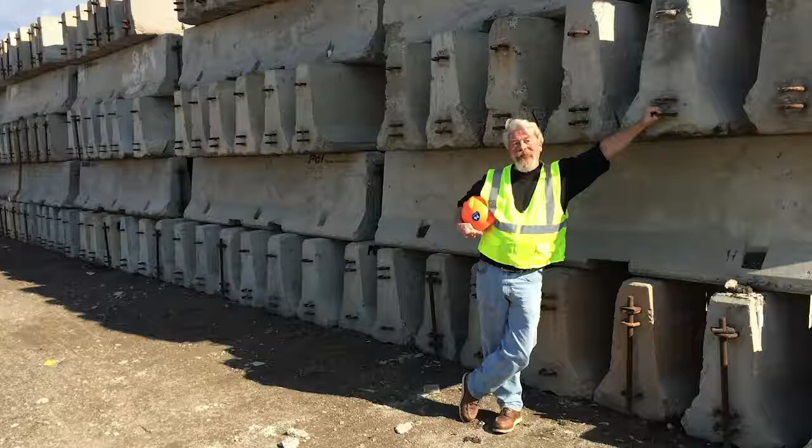The construction manager for this project is Rachel Wiedig.

HCPCI is dedicated to providing MnDOT with a project that is designed and constructed in accordance with HCPCI Design-Build Projects Conform Contracts. Our goal is a project that is safe, buildable, environmentally sound, maintainable, durable, and functions for the traveling public.

To accomplish the above goals, we are committed to emphasizing the importance of a quality project to all project personnel. The Quality Management System establishes quality management processes and procedures, integrates quality goals of design and construction, defines standards and procedures for quality management, assigns the responsibility for specific quality management functions, and establishes a process where quality is built into the product. All persons working on this project are responsible for project quality.

Success will be defined as providing a quality project, providing the understanding of quality, and project certification and acceptance.

Responsibilities: the contractor and all individuals working on the project are responsible for the construction quality of the project and for complying with the project scope of work and their quality manual. MnDOT is responsible for performing construction quality acceptance verification testing and inspection and auditing of the contractor's management system.

What is project quality? Constructing a well-designed plan means building according to the Release for Construction Plans, or RFC. Field Design Change, or FDC, is a tool for correcting plan errors and making changes as necessary to match field conditions and documenting the changes. Examples can be moving catch basins to work around conflicts found in the field, moving rebar locations to allow for better placement, or the addition of a cutoff drain to intercept water from a sand seam.

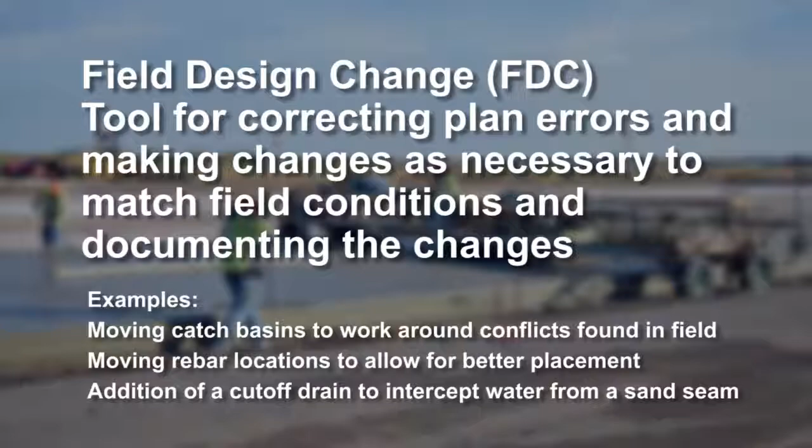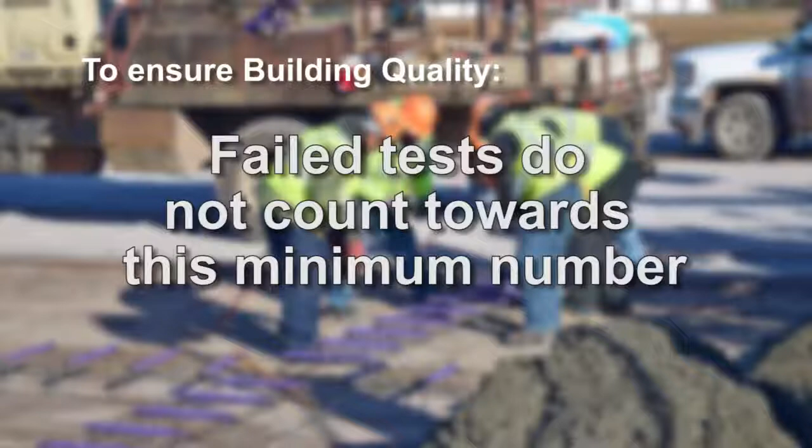To ensure building quality, all construction must adhere to MnDOT specifications and standards. All field and laboratory testing must be conducted and reach the minimum number of passing tests. Failed tests do not count towards this minimum number. Certify supplier material quality standards prior to incorporation of the material. Follow RFC plans. Communicate plan errors and resolve them at the appropriate level.

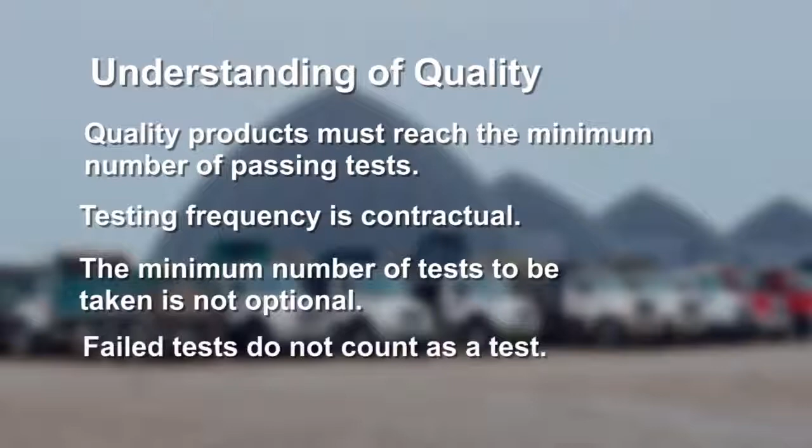Understanding of quality means the owner knows a quality product has been provided, and this is as important as quality itself. Quality products must reach the minimum number of passing tests. Testing frequency is contractual; the minimum number of tests to be taken is not optional. Failed tests do not count as a test. Any failing are documented and resolved.

Tools for providing understanding of quality include allowing for testing and inspection of all products to assure quality status. Quality incentives are in place to provide a superior product. An openness to communicate with the owner, MnDOT, helps facilitate understanding of quality.

The quality management process will perform sufficient inspections to assure compliance with specifications and the MnDOT schedule of materials control. This includes assuring that all personnel performing work on the project have the necessary experience, certifications, skills, education, and training to perform work affecting project quality.

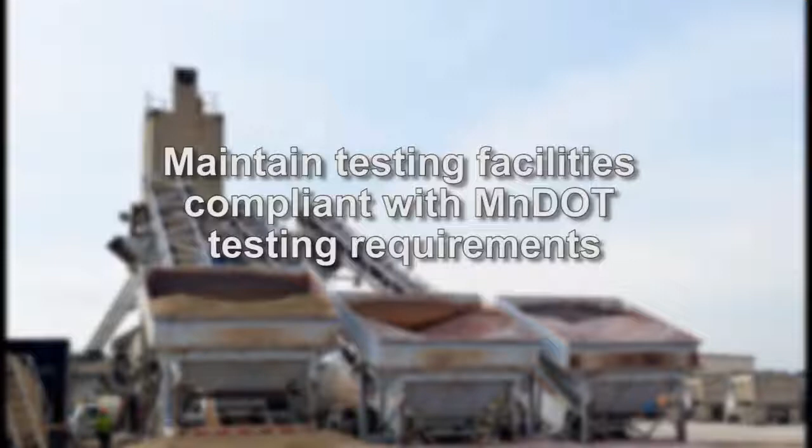Maintain testing facilities compliant with MnDOT testing requirements. Document purchase, receipt, storage, and protection of the materials on the project. Testing and inspection records are to be maintained and made available to MnDOT. Documentation and resolution of non-conforming work. Monitor post-design changes working with the construction team, inspection staff, and designers with the development of as-built drawings.

The foreman is the most important component of project quality. They must make sure that construction goes according to plan and specification, including adherence to MnDOT specifications and standards. Achieve passing material test results by knowing all material type and placement, using the right materials in the right place.

Request testing when needed or appropriate. Monitor moisture and density control throughout construction. Identify potential conflicts in plans for potential FDCs.

A critical activity point is a specific point in the construction process at which further activity associated with the deliverable is suspended until formal acceptance of the interim product is obtained.

Some examples include subgrade density and tolerance is checked prior to placement of aggregate base. Aggregate base density and tolerance is checked prior to paving. Concrete forms and reinforcing steel checked prior to concrete placement.

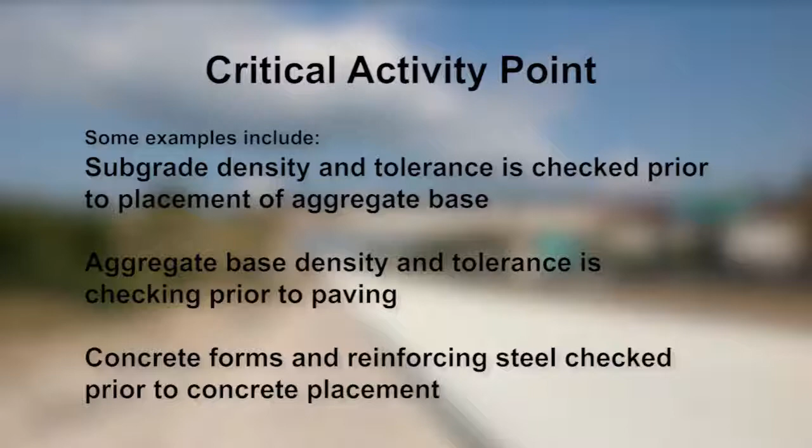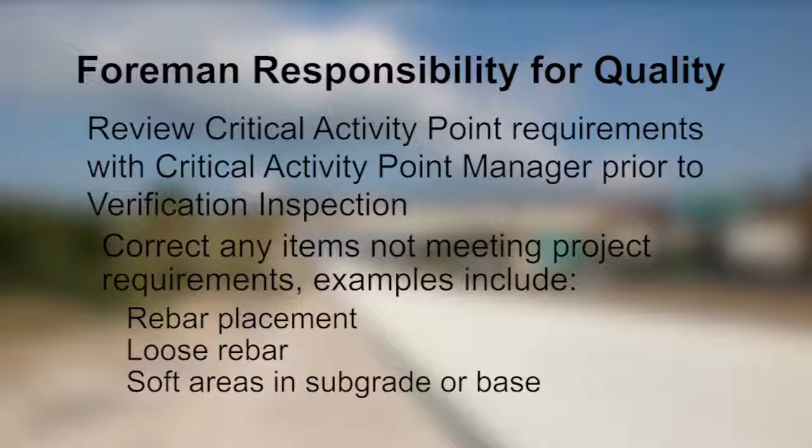Foreman will review critical activity point requirements with the critical activity point manager prior to verification inspection. They will correct any areas with failing test results and correct any items not meeting project requirements. Some examples would include rebar placement, loose rebar, soft areas in the subgrade or base. Foreman will also communicate with the critical activity point manager and MnDOT verification.

The critical activity point release form must be signed off and accepted prior to the next phase of construction. Critical activity points must be signed off and accepted by the following: Design Build Team Critical Activity Point Manager, CAPM, Design Build Team Foreman in charge of the activity, and MnDOT Verification Representative. All must agree that the critical activity point requirements have been met.

Materials delivered to the project are a critical activity point and must include the appropriate documentation prior to unloading. They also require inspection by the CAPM or quality inspector prior to incorporation into the project. Remember, quality is everyone's responsibility.

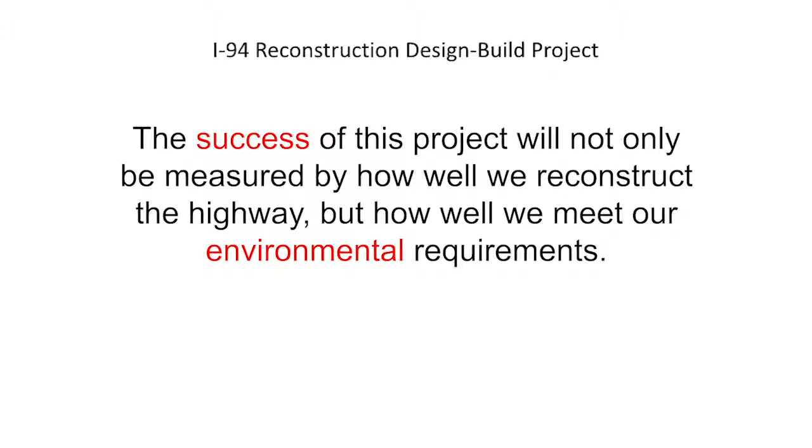The success of this project will not only be measured by how well we reconstruct the highway, but by how well we meet our environmental requirements. We have environmental commitments in protecting the environment. These commitments require permits and permit conditions, including the DNR Public Waters Permit for working in these waterways, the NPDES for sediment control, and erosion control from the MPCA.

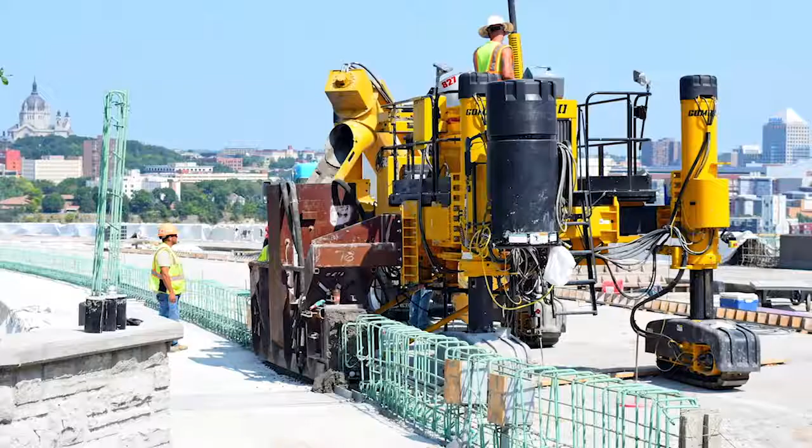These agencies will inspect the sites. Workers will be informed during toolbox training as to when to expect the agencies.

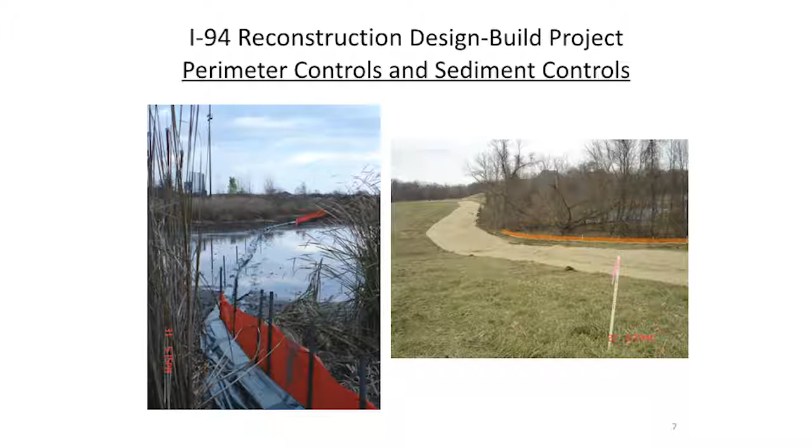In order to protect the project and meet environmental commitments, we will be installing perimeter controls. These are the last line of defense. Perimeter controls will consist of silt fences, inlet protection, filter logs, and stabilized berms. All perimeter controls must be installed properly and maintained.

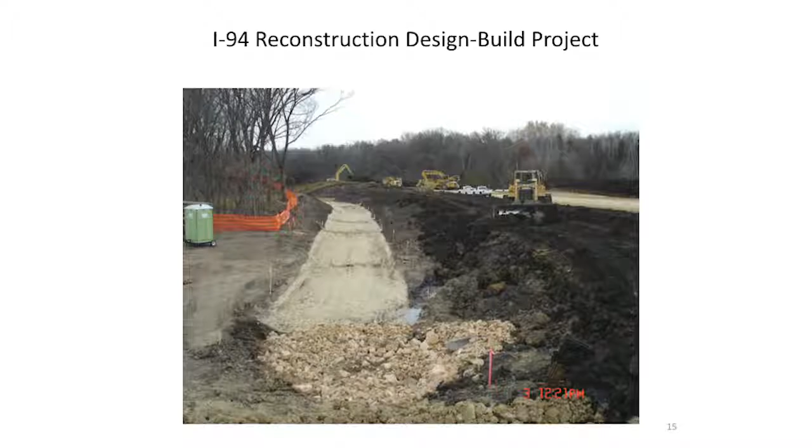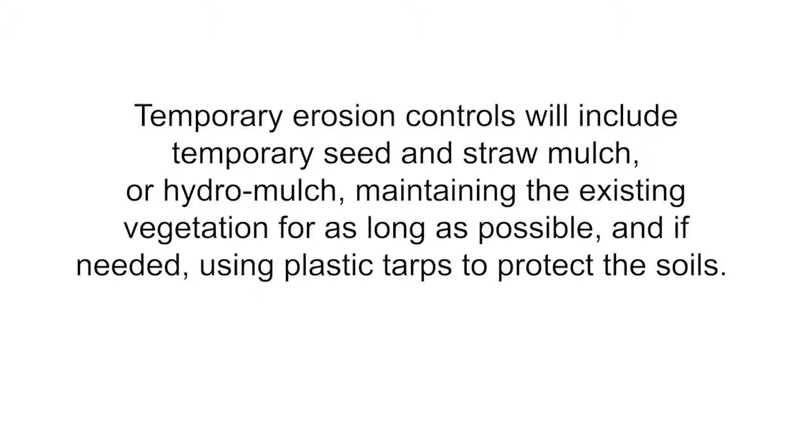Erosion control is the first layer of defense. It's easier to try and stop erosion than to try and capture soil particles once they start moving in rainwater. Temporary erosion controls will include temporary seed and straw mulch or hydro mulch, maintaining the existing vegetation for as long as possible, and if needed, using plastic tarps to protect the soils. Permanent erosion controls include turf and erosion control blankets.

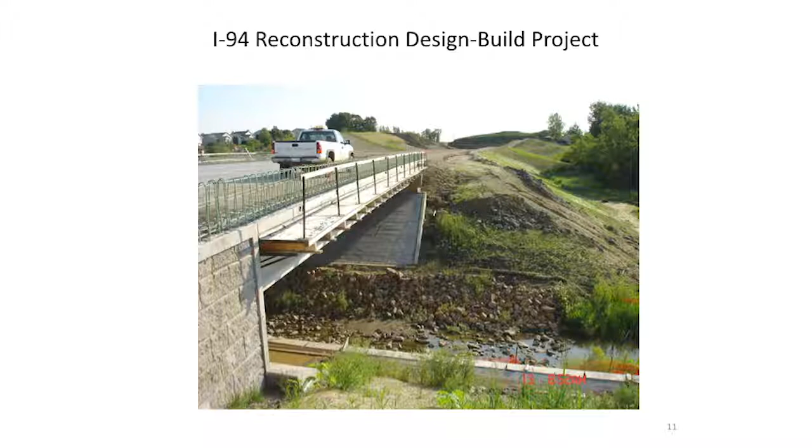Not all of these controls are performed at the same time and may be implemented throughout the stages of construction, especially at a bridge site. Different controls can be utilized numerous times over the same area. You must not drive over or damage an area that has an erosion control blanket in place. Work with your supervisor if you need to enter these areas.

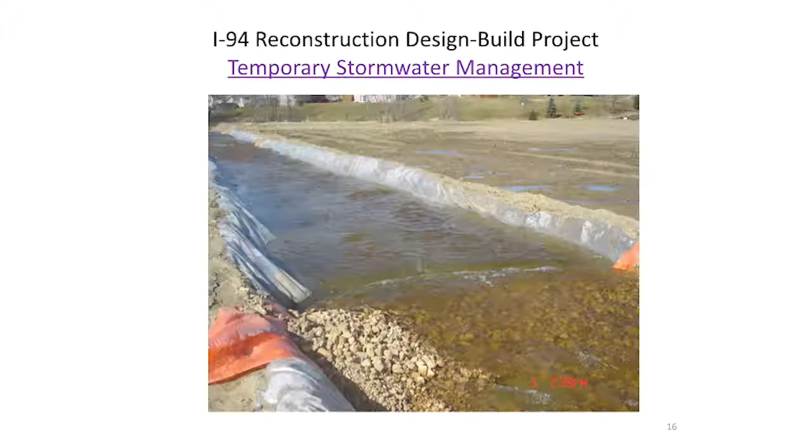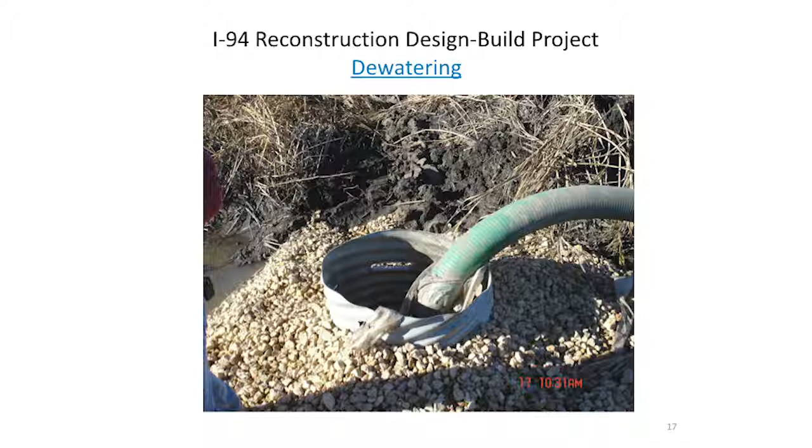All drainage ways that carry water off of the project must be stabilized within 24 hours of completion, so proper staging is needed. Temporary stormwater management is how clean water is kept clean as it goes through the site. Water bypass may be needed while working in and around drainage ditches. If dewatering is needed, filter devices such as crushed rock sumps must be used on all inlet pipes. Energy dissipators must be used on the downstream side to not cause erosion to the receiving streams.

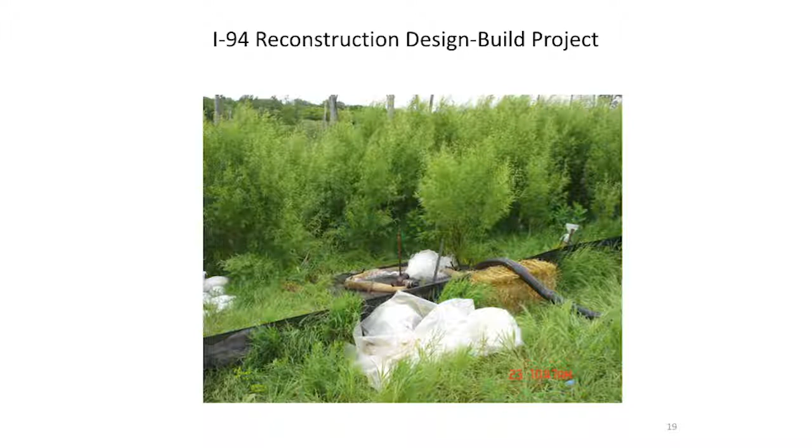There is no one-size-fits-all solution for dewatering, but all solutions must meet the goals of the permit. If you see turbid water in the discharge, the dewatering needs to be stopped immediately and a filtering device added and/or corrections made to the existing filtering device. Dewatering must be performed correctly, with no shortcuts taken.

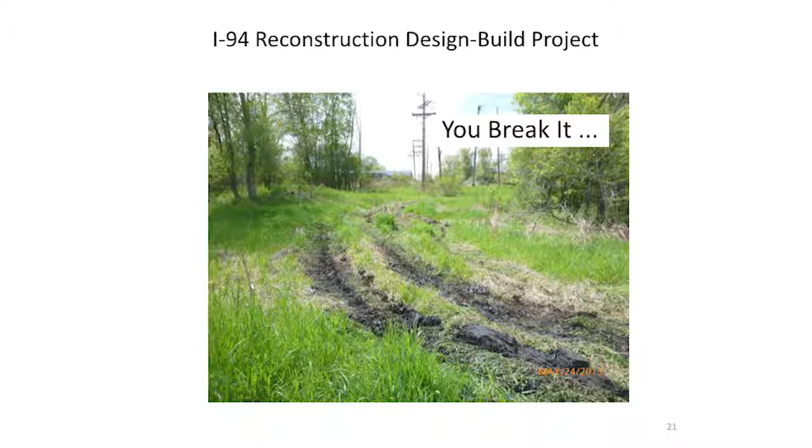Remember to stay within work areas and not drive outside of permitted areas. If you mess up a work area, you must fix it. When in doubt about the area you are working in, make a phone call or talk to your supervisor.

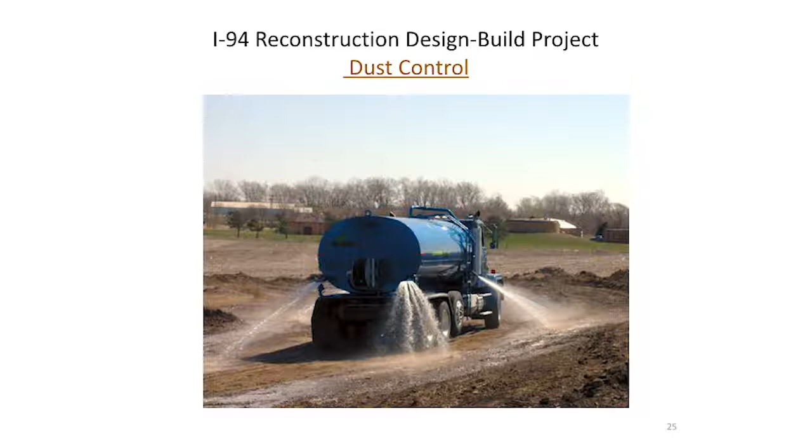First, it's bad for your health. It is also bad for the public's health. It creates nuisance conditions, and it's the law. If dust becomes a problem in your area, contact your supervisor so water can be distributed on site to keep soils moist.

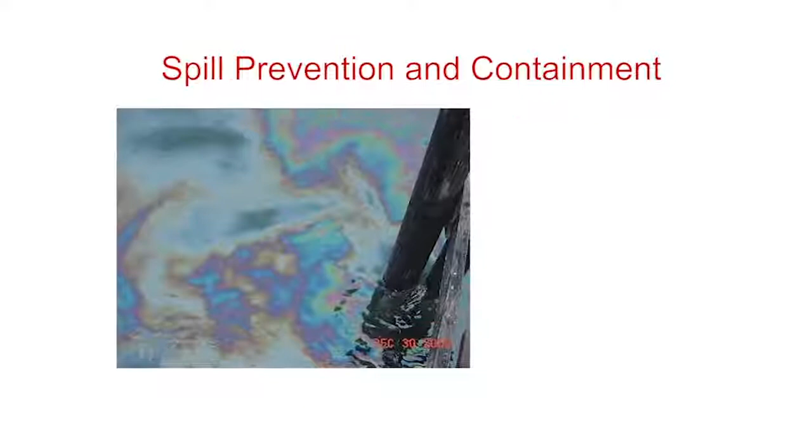Spill prevention and containment. Spills are a major problem as they impact water quality. It is easier to prevent a spill than to try to capture it once it happens. If a spill does happen, contain it as quickly as possible. Spills must be corrected immediately and notifications made.

If a spill occurs, contact the Contractor Environmental Compliance Officer, or CECO, who will report the spill to the State Duty Officer as required. Keep track of how much material was spilled. Subcontractors must provide spill kits and notify all employees as to where they are available. Spilled materials must be handled correctly. Know the requirements of your employer's hazardous waste plan and reporting requirements.

The easiest way to prevent a spill is to put all oil-containing materials in secondary containment or covered storage. Here we have drums on proper pallets or in secure containers.

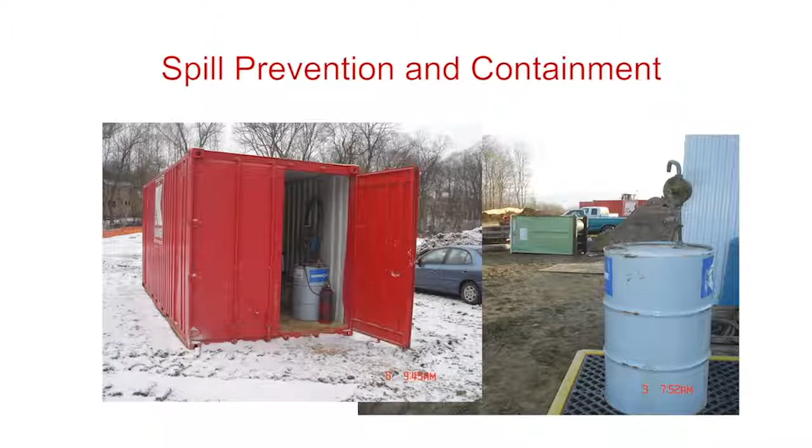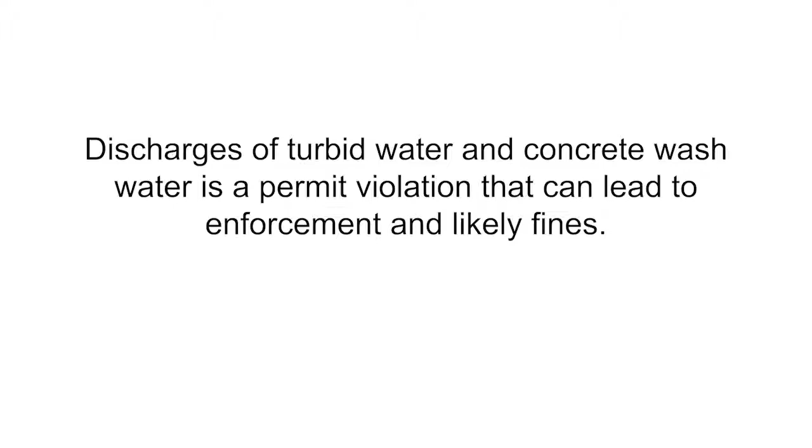Also keep in mind that turbid water, which is muddy water, and concrete wash water are pollutants. Discharges of turbid water and concrete wash water is a permit violation that can lead to enforcement and likely fines. Reporting of these discharges to regulators can occur from citizens' complaints. Never discharge muddy water to a surface water or drainage ditch that eventually leads to a surface water.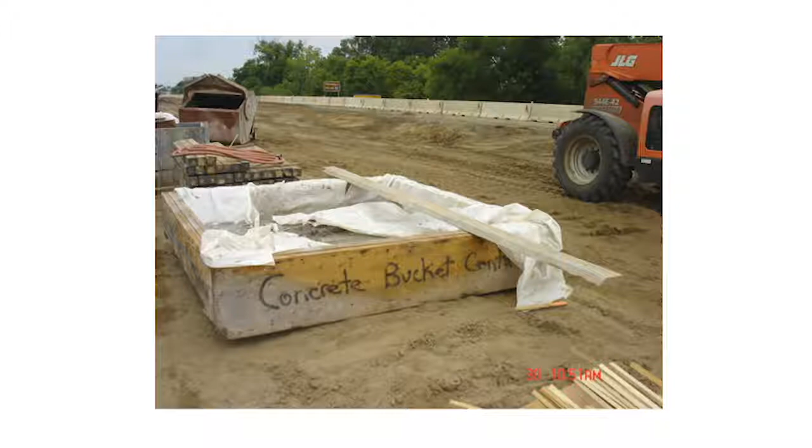Concrete and cement management is also a permit condition. Concrete washout must be done carefully and no concrete or slurry water spilled on the ground. All concrete washing is to be done into lined or metal tubs.

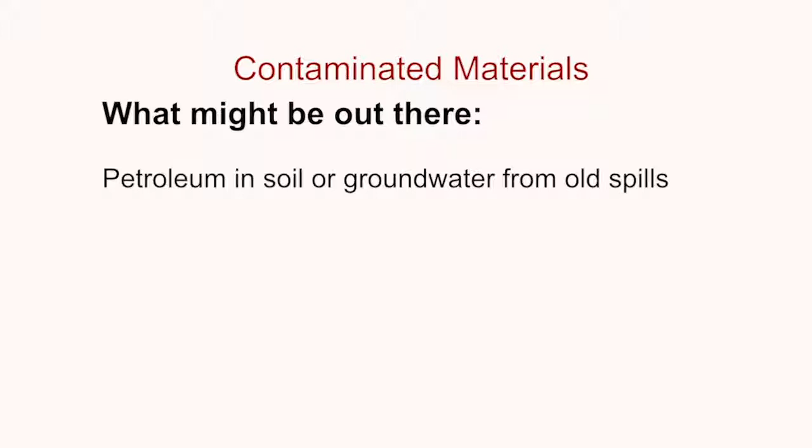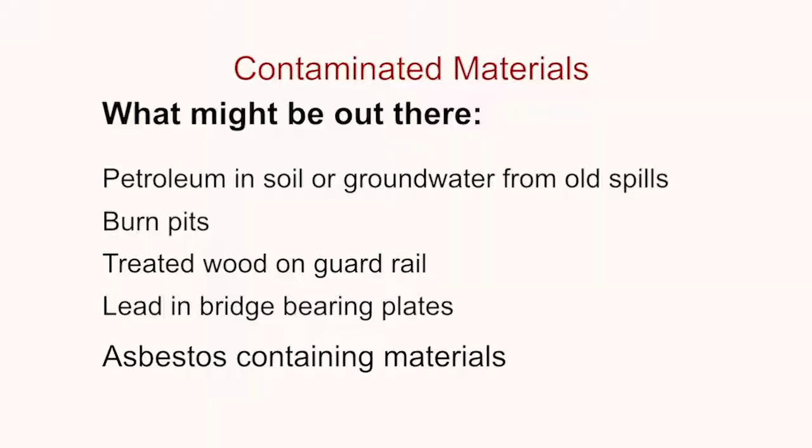Contaminated materials. Some contaminants to look for include petroleum in soil or groundwater from old spills, burn pits from old homesteads or illegal burning, treated wood on guardrails, lead in bridge-bearing plates, asbestos-containing materials. Please note, do not touch asbestos-containing materials. An abatement contractor will do the removal. Proper handling of contaminated materials is outlined in the Contaminated and Regulated Materials Management Plan.

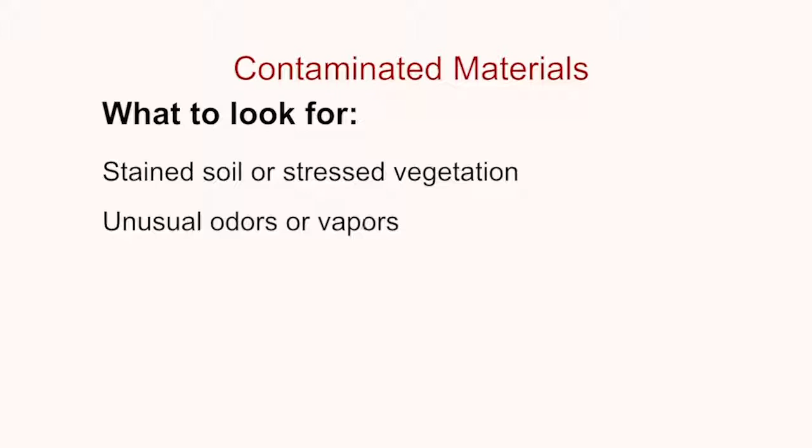We just talked about some known or suspected contaminants, but what about unknown materials? Here are some things to look for: stained soil or stressed vegetation, which could indicate a petroleum or solvent spill; unusual odors or vapors, which could indicate waste in soil or water; oil sheen in water or puddles; buried debris in the soil or illegal dump sites.

Worker health and safety. If we encounter contamination, follow the Safety, Health, and Environmental Action Plan. Use some common sense, like washing your hands before eating and drinking. For extra caution, change your clothes when you get home.

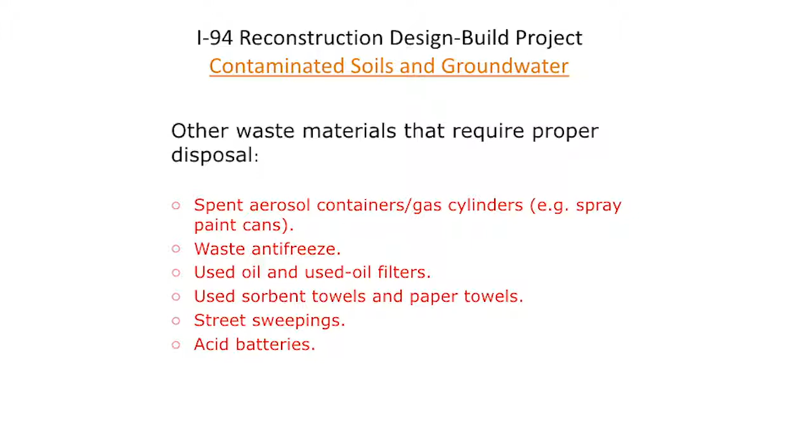Other waste materials that require proper disposal are spent aerosol cans and gas cylinders, used sorbent towels and paper towels, used oil and used oil filters, waste antifreeze, acid batteries, and street sweepings.

If you find something unexpected, stop work. Secure the site and call your site supervisor immediately. If a contaminant is found, we will follow the instructions of MnDOT's Environmental Consultant.

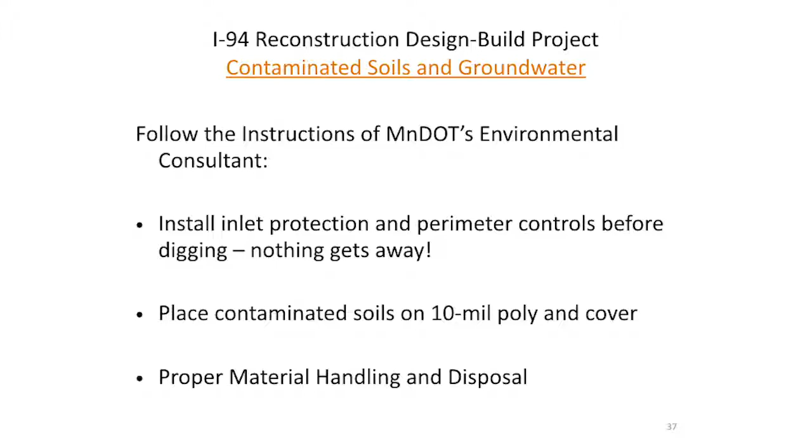Some precautions include installing inlet protection and perimeter controls before digging so nothing gets away, placing contaminated soils on 10 mil poly and covering them, and following all proper material handling and disposal plans. The consultant will take materials for testing. Work will not be permitted to continue until all testing is complete.

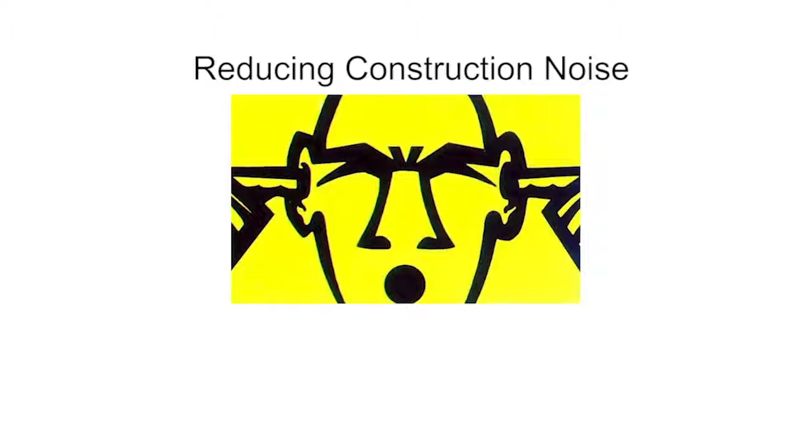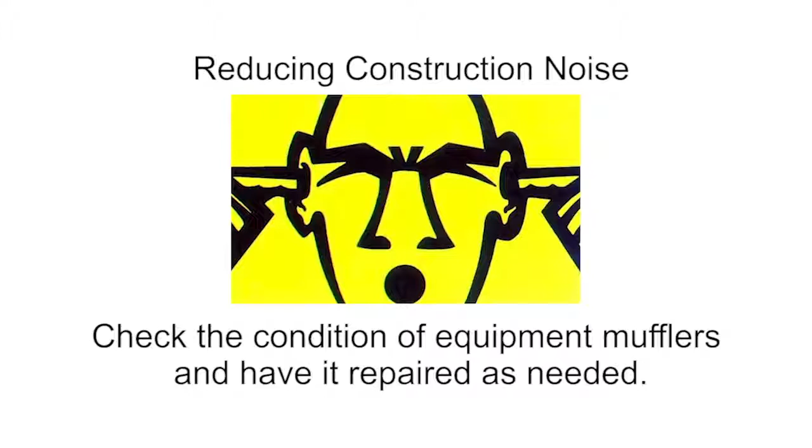It is understood that construction is noisy, but you are required to make every effort to keep noise levels down, including providing temporary noise shielding for noise generators near sensitive areas. Check the condition of equipment mufflers and have it repaired as needed. Use OSHA-approved backup alarms. We will use a one-way haul traffic pattern to reduce the need for backing up. We will strictly enforce a no slam tailgate rule.

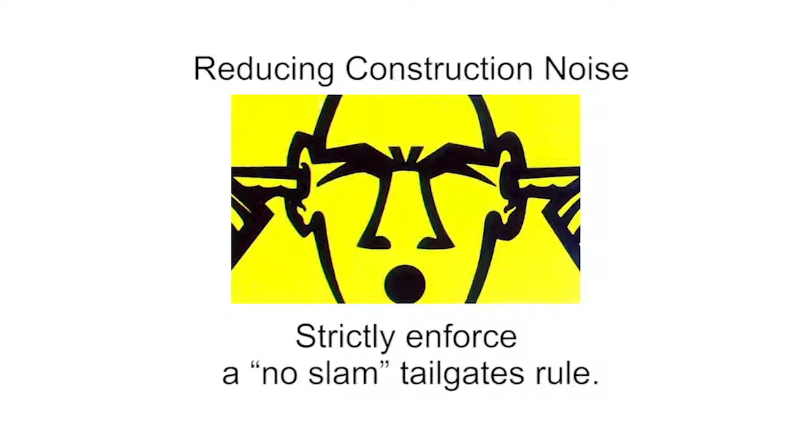MnDOT is committed to following the DNR's best practices for protecting fish and wildlife resources. Blanding's turtles are threatened and may be located in the project area. Northern long-eared bats are also a threatened species within the area.

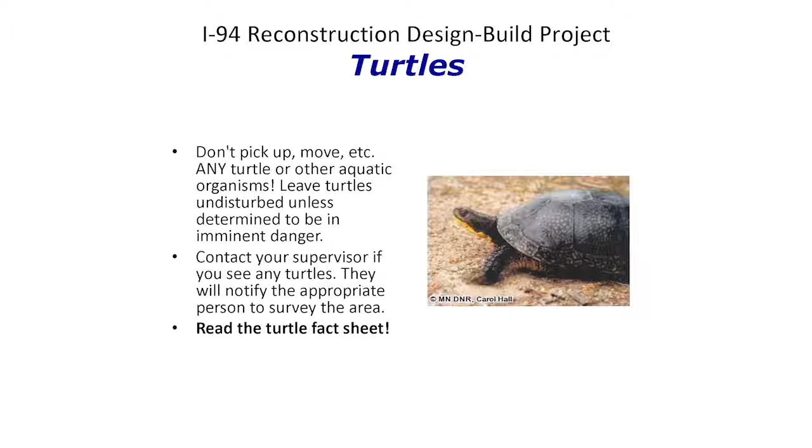Bird nests cannot be disturbed during the nesting season. No work can be permitted in lakes or streams during fish spawning. Leave all turtles undisturbed unless determined to be in imminent danger. Contact your supervisor if you see turtles, and they will notify MnDOT's Environmental Compliance Officer.

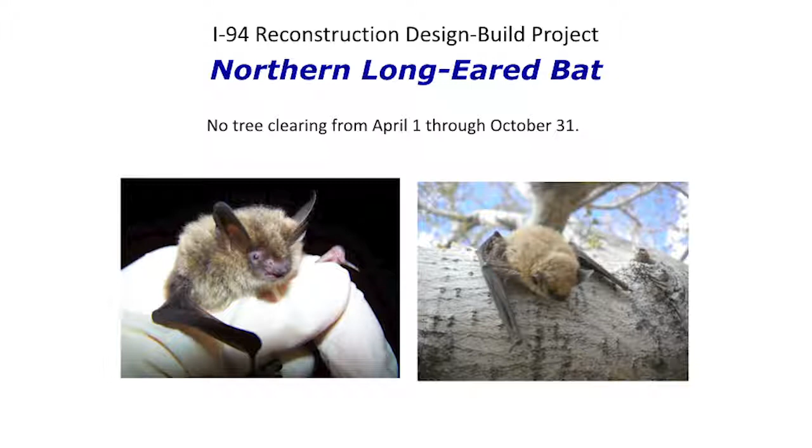Tree clearing cannot occur between April 1st and October 31st during the roosting season for the northern long-eared bat. Swallow nests cannot be disturbed during the nesting season from May 1st to September 1st. Swallow nests can be removed and swallows prevented from building nests prior to May 1st. Fish Creek and Silver Creek culverts are possible swallow nesting sites.

No work can be performed in the Crow River, Fish Creek, or Silver Creek during fish spawning from March 15th through June 15th. And no work can be performed during fish spawning in School, Mud, Locke, and Fish Lakes from April 1st to June 30th.

Also, disturbed soils within 200 feet of these waters must be stabilized within 24 hours of no further soil disturbing activities during fish spawning. Prior to any work in lakes or rivers, and after the work is completed, all equipment must be thoroughly cleaned.

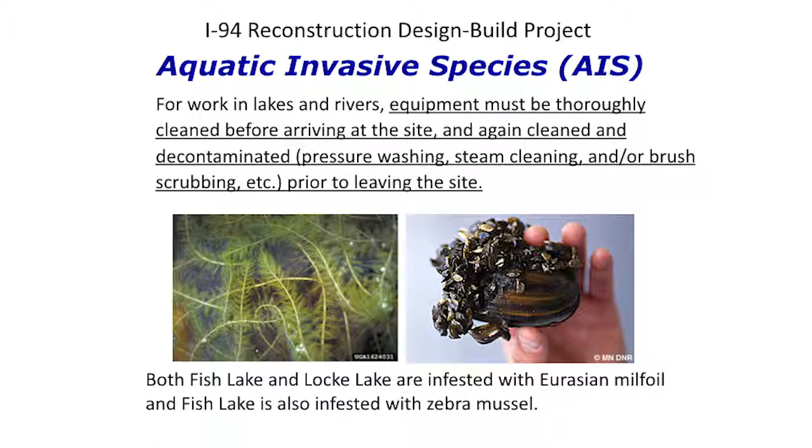Equipment must be decontaminated to prevent the potential spreading of aquatic invasive species, also known by the acronym AIS. Both Locke Lake and Fish Lake are infested with AIS.

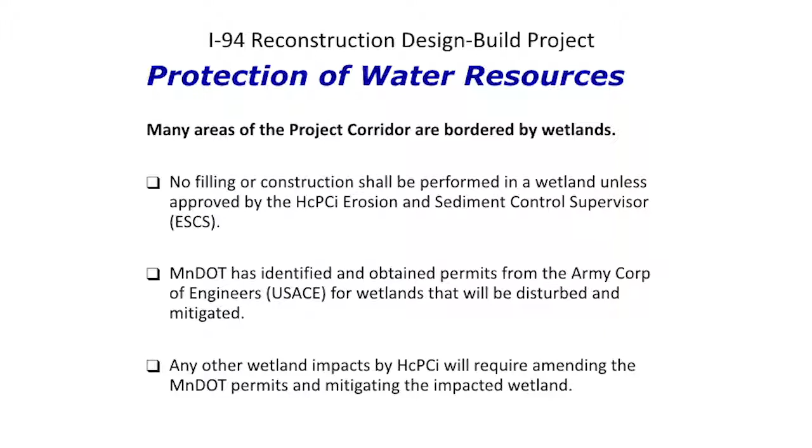Do not perform any work in wetlands unless approved by your supervisor. A permit has been obtained from the Army Corps of Engineers for wetlands that will be impacted by the project. Wetlands that cannot be impacted will be marked by redundant perimeter control, such as the combination of silt fence and biologs.

The project passes through drinking water supply management areas for both the cities of Monticello and Clearwater. These areas represent source areas where municipal wells are replenished by infiltrating source water. Avoid working outside the project limits in these areas.

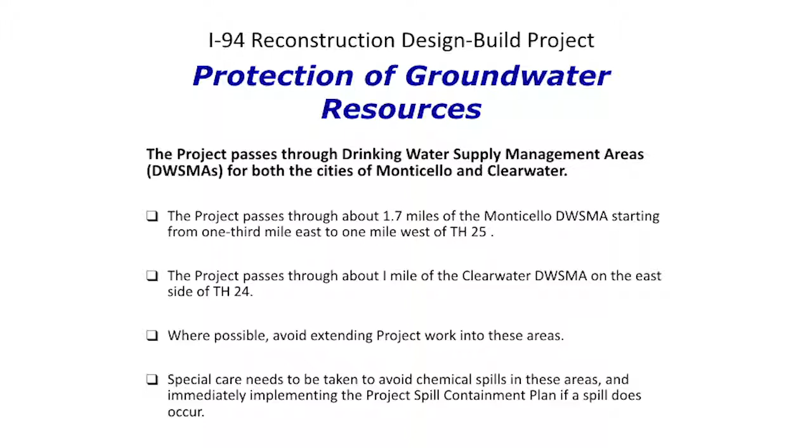It is important to avoid chemical spills in these areas, and if a spill does occur, immediately contain and clean up the spill, provided it is safe to do so.

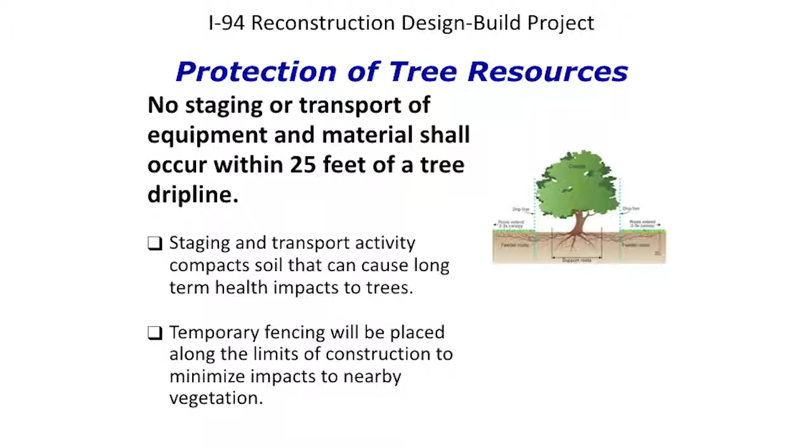Trees need to be protected from long-term impacts due to compacted soil. No staging or transport of equipment and materials shall take place within 25 feet of the tree drip line. The drip line occurs at the outer edge of the tree foliage.

The unexpected. What should you do if you find something unexpected on the job site? Stop work. Secure the site. Call your site supervisor, who will contact the Environmental Compliance Officer.

Notifications. HcPCi's Environmental Compliance Officer on this project is Alan Kessler. The project's environmental compliance efforts are required by federal and state laws and permits, as well as HcPCi's commitment to delivering a quality project in an environmentally sound manner.

The success of this project requires the cooperation of every person on the site. If you have a question, please ask. There are no dumb questions. You can ask a supervisor, the Erosion and Sediment Control Supervisor, or the Contract Environmental Compliance Officer.

For HcPCi projects, it is each person's individual responsibility to be familiar with all safety and health practices outlined by their respective company's safety manual and plan.

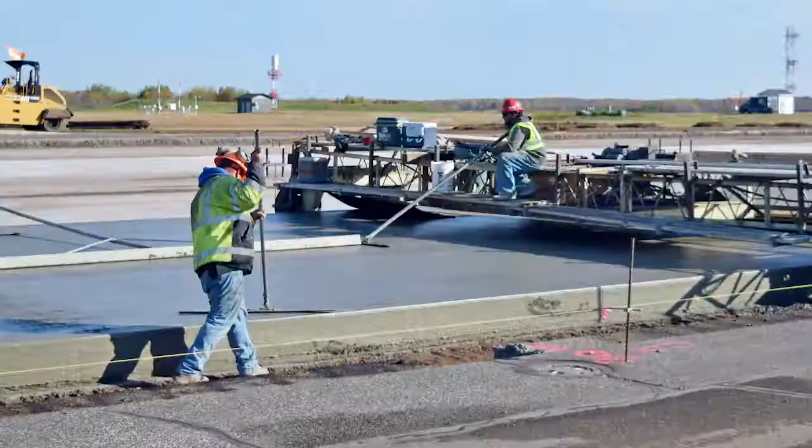Subcontractors are required to educate and train all employees and visitors before they enter the site. Subcontractors are responsible for providing safe working conditions and procedures and perform work in accordance with all applicable laws and regulations, the subcontractor's accident prevention program, and contract specifications.

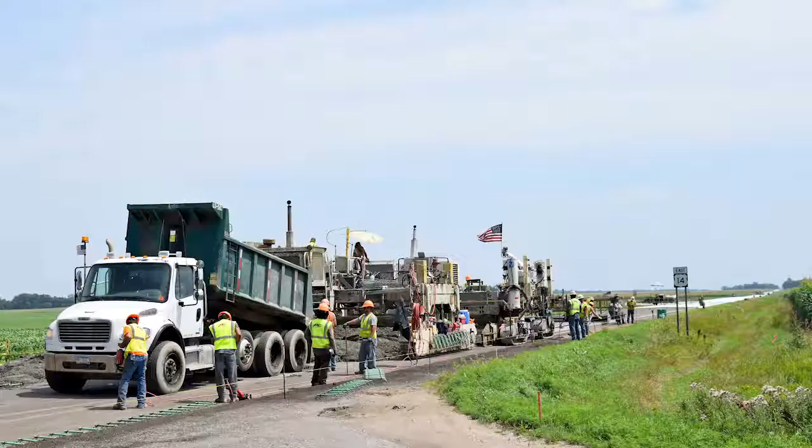All employees will be required to coach each other and visitors on the importance of safe operation and enforce the provisions of their safety policies.

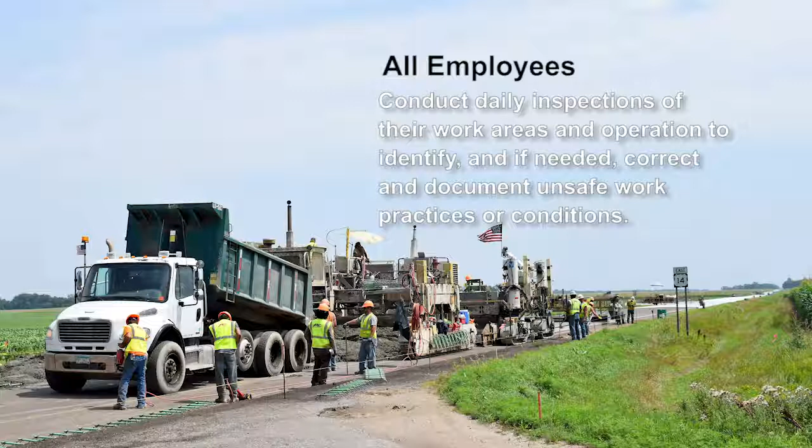Conduct daily inspections of their work areas and operations to identify and, if needed, correct and document unsafe work practices or conditions. Supervisors must investigate all accidents to determine cause and corrective measures.

Supervisors are strongly encouraged to fill out safety pre-task plan cards and complete a weekly site safety checklist. Supervisors must also assist in the development of job hazard analysis for each major phase of work and for all types of operations that have not been previously analyzed.

All work operations must be performed using good judgment in compliance with OSHA regulations and all health and safety requirements. Subcontractors must inform HcPCi of any hazardous conditions created by their operations.

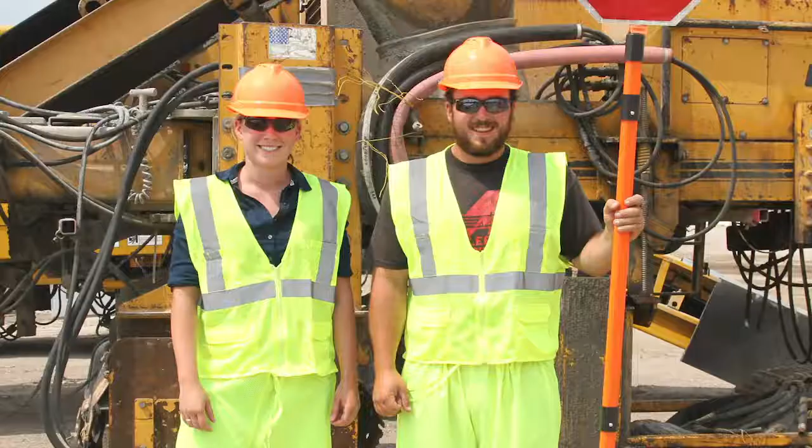Safety is everyone's responsibility. To ensure your safety, proper PPE is required at all times. At a minimum, employees must wear a hard hat, high visibility vest, and work boots while in all work zones.

You can help prevent accidents and injuries before they start by staying alert at all times, by being aware of your surroundings and situations that may cause or lead to accidents or injuries.

Immediately notify your supervisor of all unsafe work conditions or acts. All unsafe conditions and hazardous situations must be corrected immediately. Fighting or horseplay will not be tolerated.

Safety meetings and training. Safety meetings with all supervisory personnel will be conducted by or at the direction of the project manager to review accident prevention efforts and results, along with safety policy and procedures pertinent to the work being performed.

Supervisors will hold toolbox or tailgate safety meetings with their crews to discuss procedures, suggestions, past accidents, and educational materials. Additional meetings may be held when there are crew changes or significant changes in job conditions. This training will be documented.

For operations where more specific training is required by law or regulation, subcontractors must provide their employees additional training and document accordingly. Subcontractors will also participate in safety meetings held by HCPCI when work within the scope of their subcontract is in progress. A record of safety meetings and safety training will be submitted to the project manager.

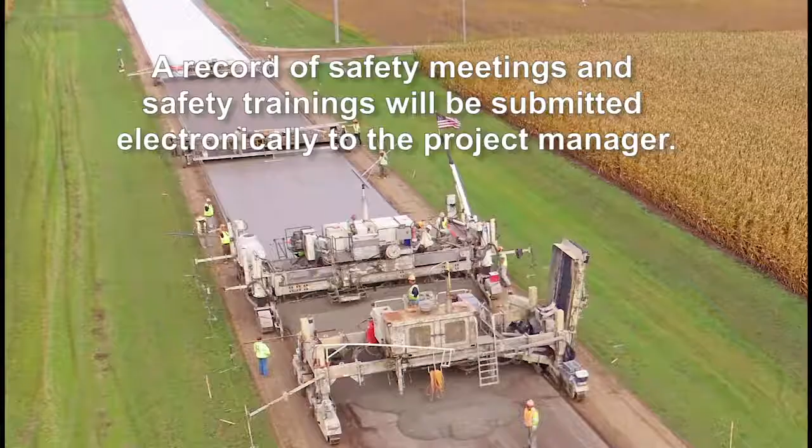It is the responsibility of all subcontractors, supervisors, and foremen to properly train their employees and make them aware of any and all hazards related to road and bridge construction. Proper training must meet MnDOT and OSHA requirements.

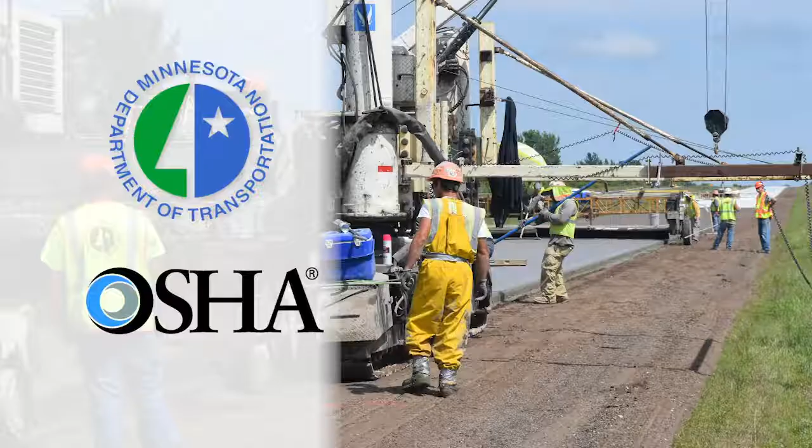Health and physical information: employees should be physically capable of doing their jobs. Be sure to keep well hydrated and be aware of the changing environmental and work conditions around you.

No person will knowingly be permitted on the job while under the influence of any substance, including alcohol, illegal drugs, controlled substances, and prescription or over-the-counter medications.

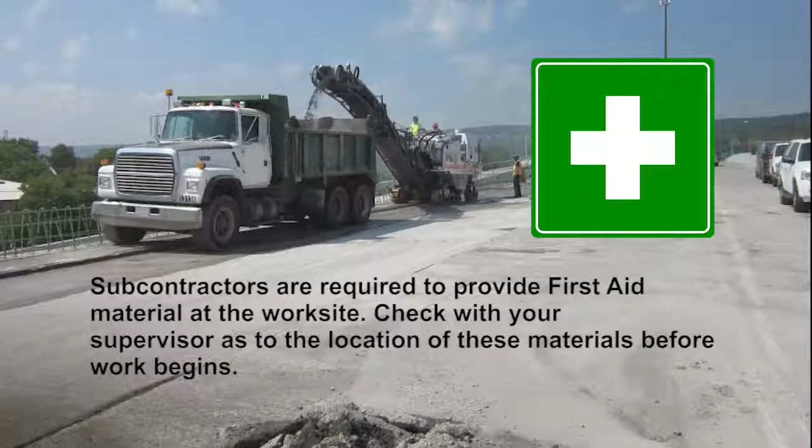Subcontractors are required to provide first aid material at the worksite. Check with your supervisor as to where these materials are located before work begins. At least one employee per subcontractor must be trained in first aid and be available at all times to render immediate treatment. Report all accidents, injuries, and illness to your supervisor immediately, regardless of how small or minor they may seem.

Please note that immediately means the same day the injury occurred. If an employee is injured on the job, that employee's immediate supervisor must complete a first report of injury form, and if needed a claims report, and turn it into the project office on the same day the injury occurs. Accidents and injuries must also be reported to the project safety manager immediately.

Please note the medical services available for this site. These will be posted in the main field office and should be regularly reviewed and discussed at the toolbox safety meetings. Safe work practices: personal protective equipment.

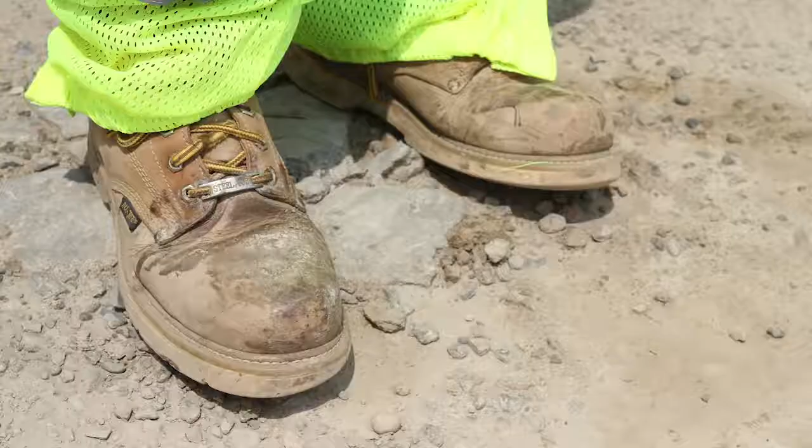All employees must be properly clothed while on any HCPCI worksite. This may include ANSI approved hard hat and vest, proper footwear, proper hearing protection and protective eyewear, high visibility traffic vests, and full-length pants and a shirt with sleeves. Also, wear gloves if needed.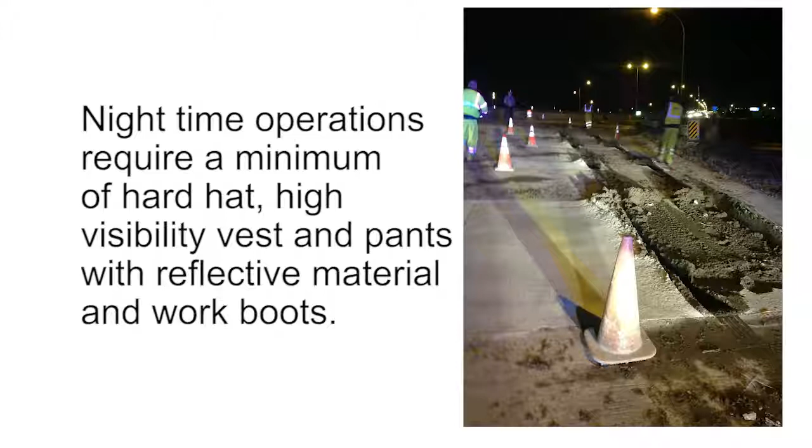Daylight operations require a minimum of a hard hat and high visibility vest and work boots. Nighttime operations require a minimum of hard hat, high visibility vest, and pants with reflective materials and work boots.

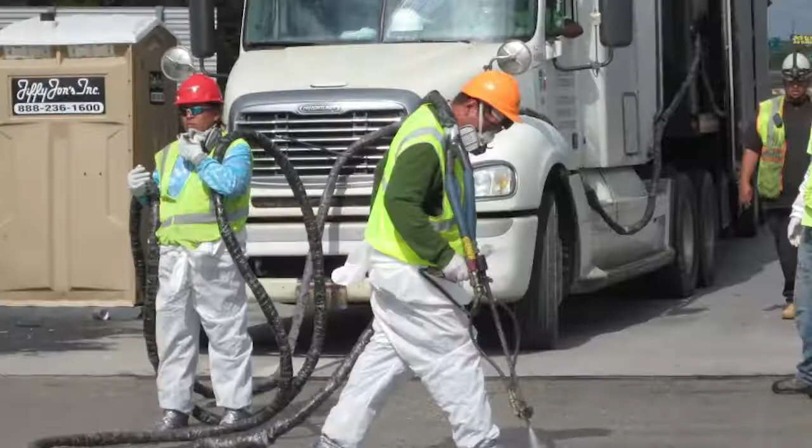When needed, all subcontractors must develop and implement a fall protection plan in accordance to OSHA standards on fall protection. Approved respirators must be worn when operations or conditions create hazardous levels per OSHA standards. Employees required to wear respirators must have received respirator use training, fit testing, and an annual medical evaluation.

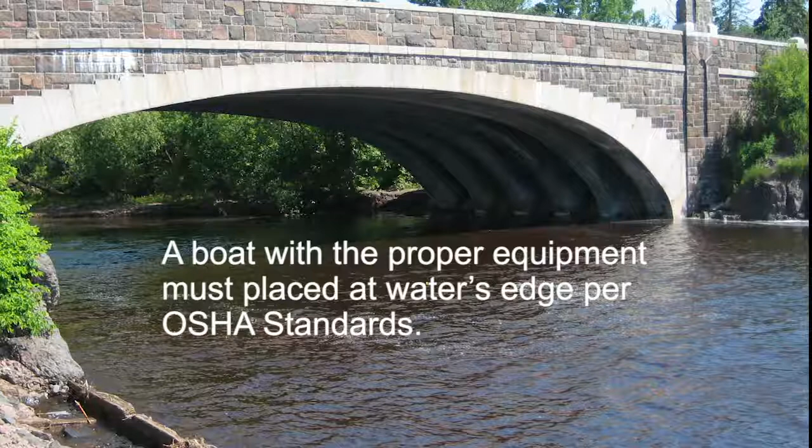Safe work practices: water hazards. When working over or near water, U.S. Coast Guard approved personal flotation devices must be worn at all times. The vest must be completely fastened by zippers or belts. A ring buoy with at least 90 feet of attached rope must be placed adjacent to the water where the danger of drowning exists. A boat with the proper equipment must be placed at water's edge per OSHA standards. Please refer to OSHA's guidelines for working near water hazards.

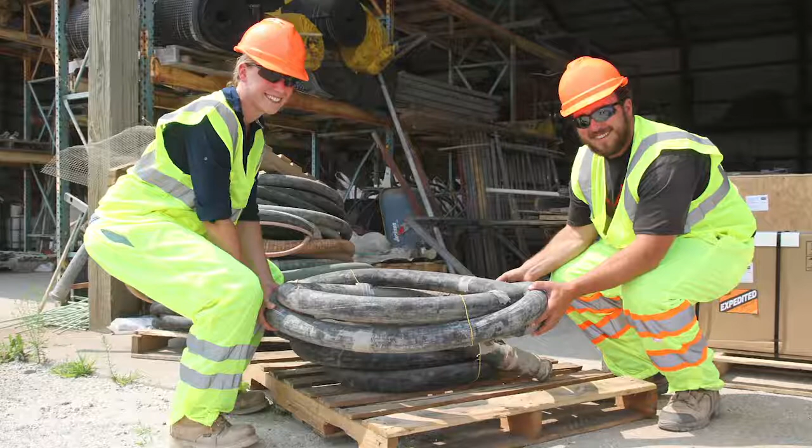Material handling: proper lifting and material handling must be followed at all times. Subcontractors must train their employees on proper lifting and material handling techniques. Manual heavy lifting should be avoided whenever possible through the use of power equipment. HCPCI requires the proper use of power equipment to move and lift materials.

Hazardous materials must be transported in such a manner to reduce risk of spills or contamination. All hazardous materials must be properly marked and secured at all times. Please note all requirements for handling hazardous materials.

No work activity or processes are allowed within 50 feet of the track center line while trains are passing through the worksite unless specifically authorized. Personnel shall always, where possible, stand at least 20 feet back from the tracks to prevent injury from flying debris or loose rigging. Also, personnel shall observe the train as it passes and be prepared to take evasive action in the event of an emergency.

Personnel shall not walk, stand, or sit on the rails. As the rail surface can be extremely slippery, personnel must step over the rails when crossing tracks. Personnel shall also be aware railway ties can be slippery and that railway ballast can shift while walking on top of it.

Personnel shall not foul the track with any piece of equipment without a rail company flag person and proper protection. Certain projects will require the assistance of a qualified flag person. The decision as to where flag persons are required rests with the rail company. A 45-day advance notice is required before entering railway property so that flagging protection requirements may be determined and arranged for.

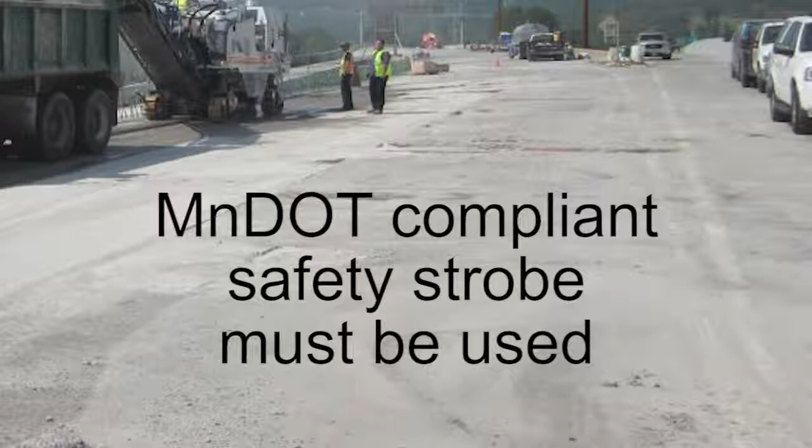General workplace safety. When arriving on a work site, park your personal vehicle as directed by your supervisor. Keep clear of the traveling public and other contractors' work zones. If traveling occurs in the construction zone, a safety strobe compliant with MnDOT specs, or emergency flashers at the least, must be on. This is very important at night.

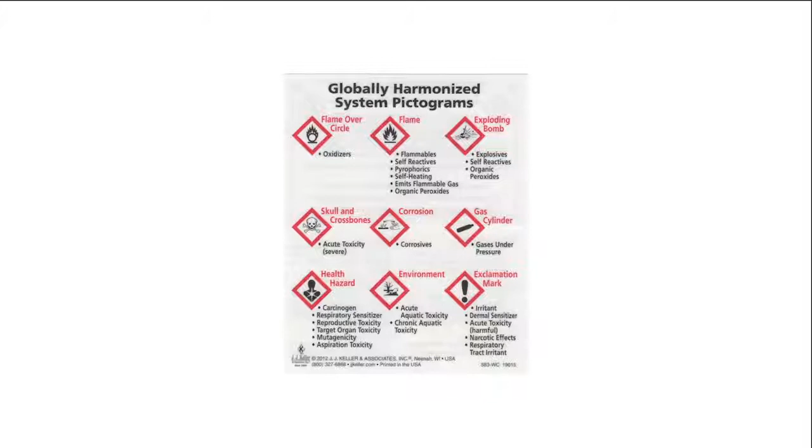Observe all warning signs and tags posted on the job site and any equipment. These signs identify hazards that could cause accident or injury. All employees must be familiar with the Globally Harmonized System of classification and labeling of chemicals, or GHS, commonly known as MSDS.

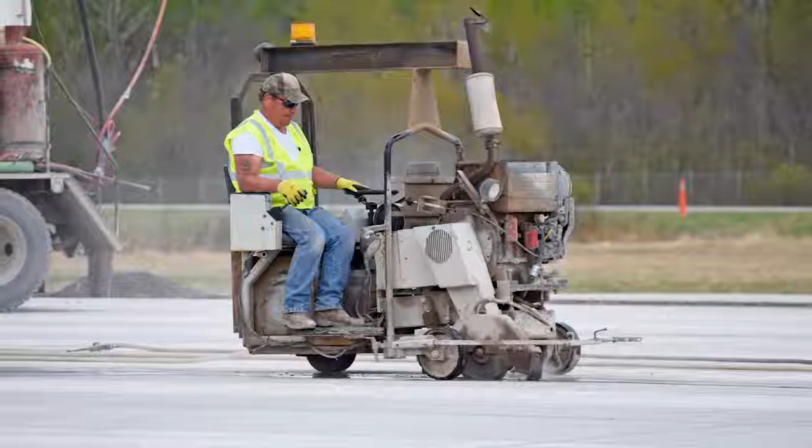Be sure to wear all required PPE and communicate with vehicle and equipment operators to be sure they know where you are. Do not assume they see you. Also, keep your area clean, avoid all spills, and take immediate action to clean them up. Understand and follow all reporting procedures for hazardous material spills.

Tool and equipment safety. Be sure to follow all safety requirements for tool and equipment operation found in your employer's policies. General safety includes: before using any tool or piece of equipment, check to be sure it is in safe operating condition. Only use tools and equipment for their designated purpose. Equipment operators are responsible for the safe setup and operation of the equipment. Be sure to follow all lockout-tagout policies in your company's safety manual.

Vehicle and equipment operation safety. Be sure to follow all safety requirements for vehicle and equipment operation found in your employer's policies. Wear seat belts at all times, including operators and all passengers, and only ride in approved areas of vehicles or equipment.

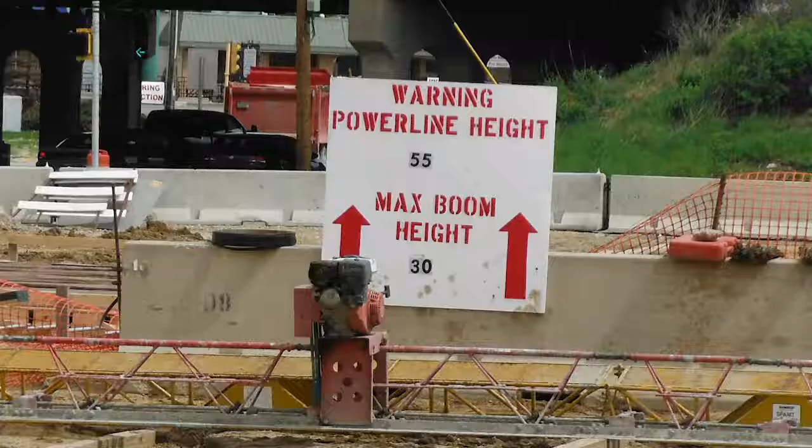Be aware of power lines, especially those that are low-hanging, and incorporate any pre-planning necessary when working in and around power lines. This is especially important while working at night.

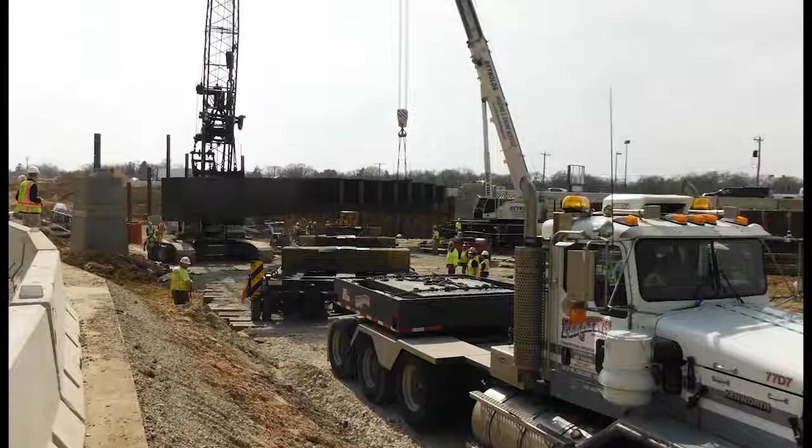All trucks rated as commercial vehicles can only be operated by employees who possess a valid commercial driver's license, or CDL. Vehicle operators should never work under or near boxes without safety jack stands in place. All crane operators will be required to have an applicable CCO certification for the cranes they are operating. All vehicles and equipment with obstructed views to their rear must have audible backup alarms operational.

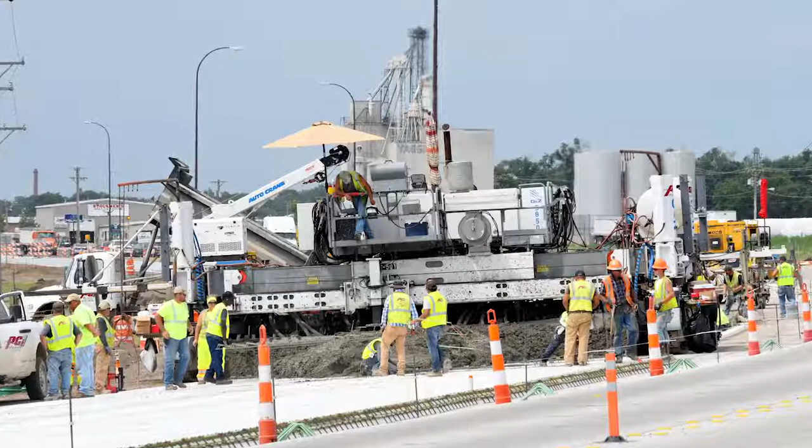Public safety. It is important to remember to keep the public safe on this or any work site. This job is in a high traffic area where cars can break down. Always be on the lookout and know what to do should an unexpected person be on the job site. Great care should be taken when working in and about traffic.

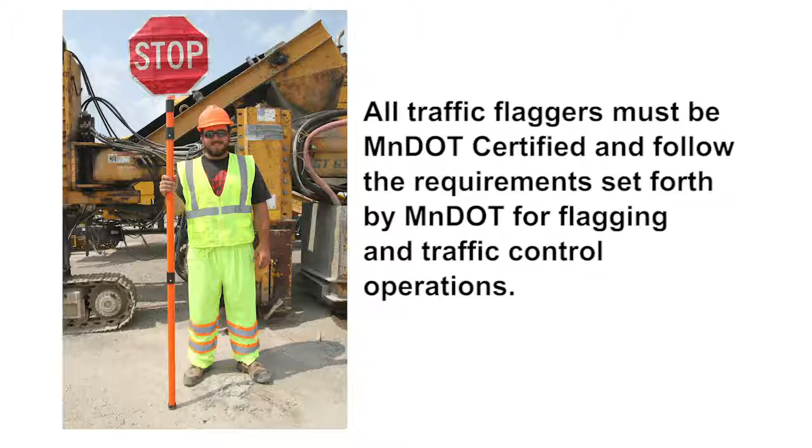Adequate traffic control must be in place whenever work activity will impact public traffic ways. Please refer to your employer's safety plan for working with public traffic. All traffic flaggers must be MnDOT certified and follow the requirements set forth by MnDOT for flagging and traffic control operations. If it becomes necessary to delay, detour, or otherwise inconvenience the public, every effort will be made to do so as courteously and safely as possible.

If necessary to operate on existing roads outside the construction area, all necessary permits must be obtained by the subcontractor from the appropriate public or private authority.

When excavation is needed, you must contact Gopher State One Call at least two business days before an excavation occurs. Send locate tickets to utility operators with underground facilities near your dig site. Please note, subcontractors are responsible for their own locates.

If a gas line is ruptured, call 911 immediately. Contact the utility, cordon off the area, and begin an evacuation. Contact the project manager immediately for all utility hits.

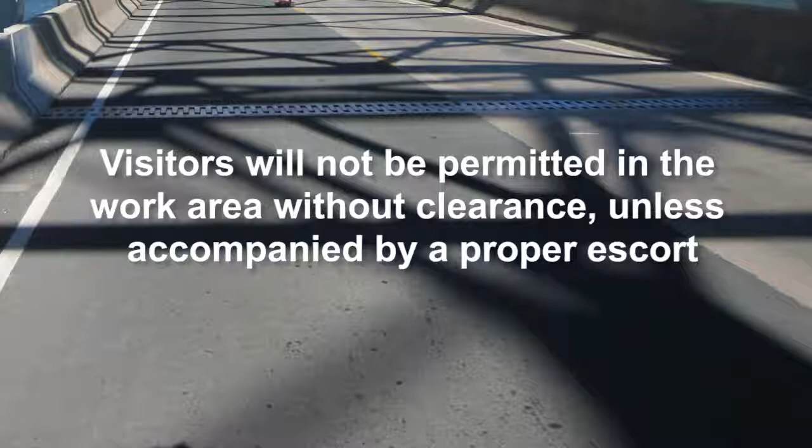Visitors will not be permitted in the work area without clearance, unless accompanied by proper escort. Visitors must complete all proper training per subcontractor policies. Visitors will wear appropriate personal protective equipment.

If you have any questions concerning safety, environmental, or quality requirements, please contact the appropriate person listed.

All subcontractors are responsible for their employees, vendors, inspectors, and associated personnel to watch this orientation video and document accordingly that they are properly trained for their work functions before they are permitted on the work site.